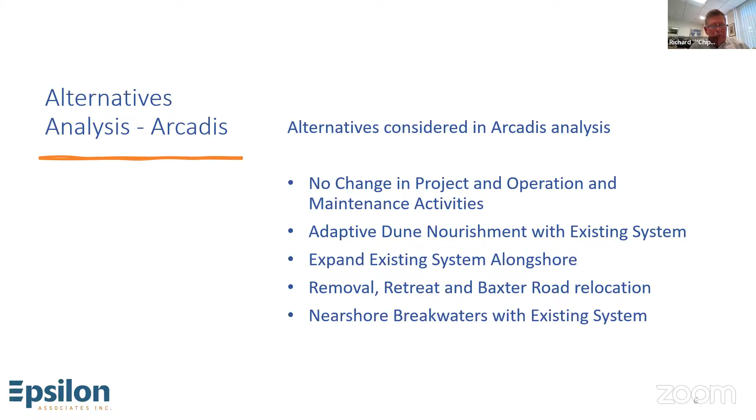Okay, I appreciate that. I think next we're going to go on to the Coir Terrace, which was an alternative that has been used in some portions, but we've considered it to be, I guess, subpar in terms of being able to protect the toe. Dwight, I'm going to turn to you and to Gordon, right? Sure. I could just briefly discuss this and then hand it over to Gordon for a little more detail and context, because I know he's looked at this alternative a little more closely.

As discussed several times tonight and through this process, there has been Coir Terrace along this reach, and actually the initial notices of intent included basically Coir Terraces from 119 all the way down to 59. The subsequent ones reduced those areas just to like 85 to 59, and basically they've been in place from 83 or 81 down to 59. And they've been in place for nearly 20 years.

We see that they provide some level of protection in terms of helping to reduce the rate of erosion, but we still see the block failure, the slope failure, the erosion of the bluff. We still see some retreat of the top of the coastal bank, and in this high intensity environment, those alone, as Chip mentioned, are subpar as compared to a more robust feature such as the geotubes.

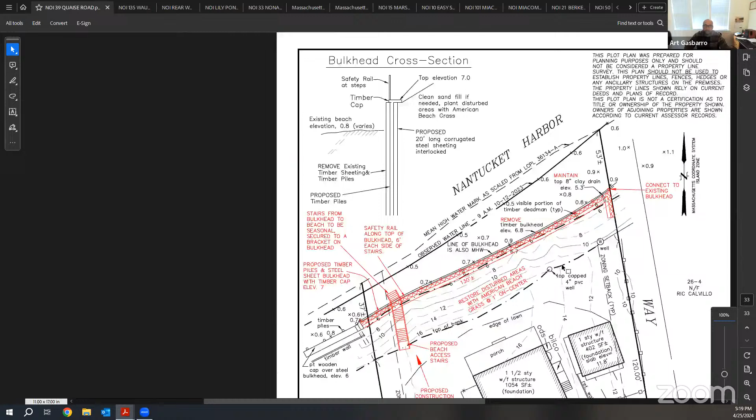Thank you, Mr. Chairman. We're before the commission tonight for the continued public hearing on this application, which involves installing a bulkhead to replace an existing failing timber bulkhead. And based on previous discussion, we had come back to the commission with installing the bulkhead landward of the existing timber bulkhead instead of seaward. And that's what's shown in red on the plan before you with the zigzag type line. And so the last discussion where we left it with the commission, I believe, was there were some questions about the proposed beach stairs. And what we've done is to change the lowest section of the beach stairs, the part that runs from the top of the bulkhead to the beach, to be seasonal.

And that is, we would put a couple of brackets on the bulkhead cap and have a prefabricated set of stairs. It's likely only to be about 4 steps that could slide into that bracket, sort of have a pin or bolt of some sort to secure it through the season. And then at the end of the summer season, those steps could be lifted out of that bracket and carried up and stored in the upland, so that during essentially the winter months, there would be no set of stairs from the top of the bulkhead down to the beach. And then during the season in which the owners are going to want access down to the beach, they'd be able to use a set of stairs to get to the beach on their own property.

I would point out that this set of stairs is nearly identical to the set that is just a couple hundred feet to the west at number 41 Quaise Road, that was approved by the commission and for which a Chapter 91 license was issued. We will be also going to Mass DEP Waterways for a Chapter 91 license for this. Again, we don't believe that the small set of stairs is going to have a detrimental or adverse impact on the interests protected by the commission. Not going to significantly interfere with the rights of passage along that beach for the small bit that it projects. I think that the point of no adverse impact and continued access is clearly demonstrated by the same set of stairs that exists so close nearby on the adjacent property.

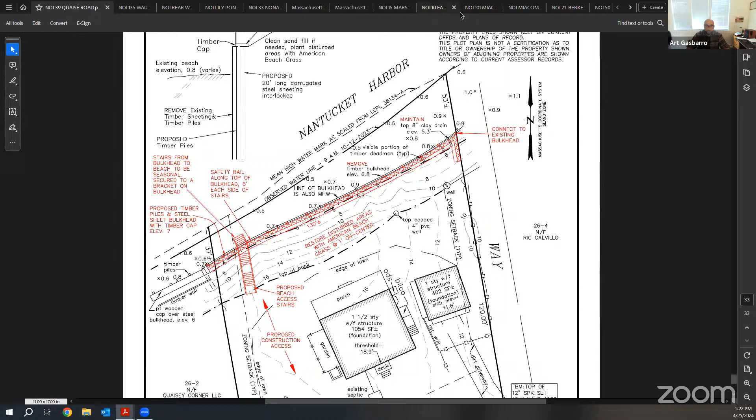And then Attorney Wood is also on with us tonight and has reviewed these materials. We also did a fair amount of research as to other situations very similar where there are a set of stairs on an adjacent way that the commission has permitted an owner to have a set of stairs on their own property. And so we believe that on the basis that this application and this proposal is not going to have an adverse impact on the protected interests and is consistent with other decisions of the commission, that an order of conditions would be issued. And with that, we'd be happy to either Mr. Wood or myself address any additional questions or concerns should the commission have them with the application. Thank you.

Thank you. Commissioners, any questions or concerns? All right, I have one, and it is that generally in permitting these beach stair projects, we receive some type of drawing or cross-section of those stairs. And I don't see that in this packet application, so I'd request that before moving forward.

Mr. Chair, we certainly could provide that. I mean, is that something that we could just have for staff approval? It's going to be a standard section we're going to provide. It's going to be really no different than any of the other stairs, but if you're comfortable with that, we could, it's just the cross section. I don't know.

Yeah, I'm personally comfortable with that. I just think it needs to get into the packet or into the record and into the application so that there's no confusion later on. I'm comfortable with that, Mr. Chairman. Do any members of the public have questions or comments? I see none.

Will, do we have everything we would need to close this application? Yes, we do, pending the cross section, obviously, but we would be closing it with that noted. Yeah, we can add that in the order of conditions. Art, would you like to close the application? Yes, please. Is there a motion to close the application? Mark, thank you. And Mike, I'll give you the second.

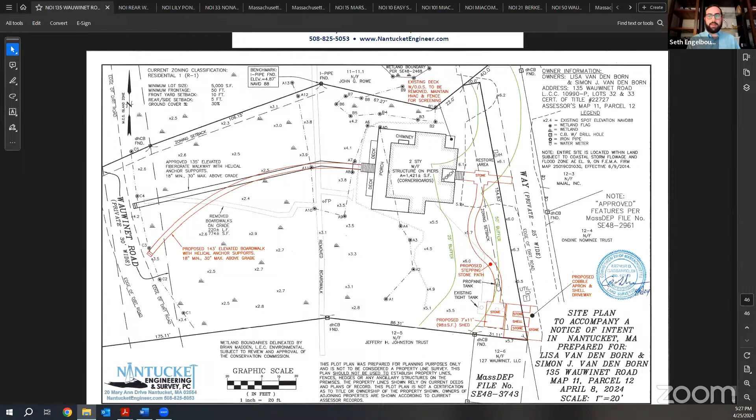Thank you, Art. Will, can you stop the share? Questions, comments from commissioners? Any members of the public would like to chime in on this application? Please raise your hand. Seeing none. Will, do we have everything we need to close? Yes, we do, Seth. Art, would you like to close? Yes, please. Do we have a motion to close? Thank you, Tim, and thank you, Mike, for the second.

By roll call vote, Tim Brain, aye. Mark Beal. Thank you, Art, for making those adjustments. Aye. Mike Mizzarelli, aye. And Linda Williams, it's your turn. Aye. Okay, that closes with unanimous consent. Thank you, Art.

That will bring us into our next agenda item, which is Woodbury Lane Association, rear Woodbury Lane, SE 48 37 49, represented by David Haines. David, good evening. Good evening to you. We continued this a couple of meetings ago because it needed to be posted in the environmental monitor, which it was. And so that was taken care of. Also, we did submit a letter in response to Ms. Fader's letter from last time regarding the drainage.

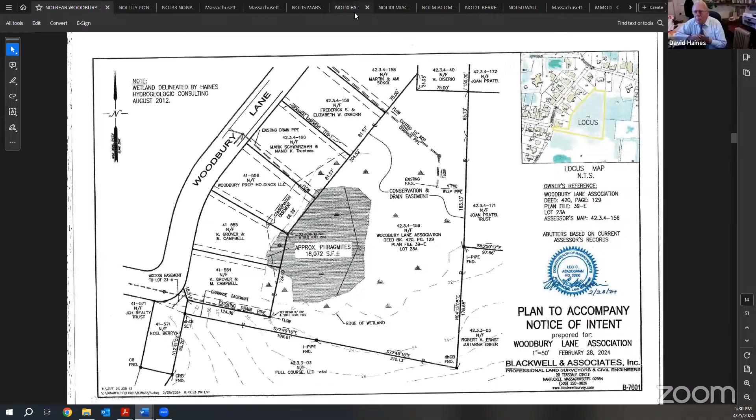Did you want me to go over the procedure that we're proposing to use, or people remember it? If you would like to briefly go ahead. Okay, it's to go in and cut off any seed heads that are there, and dispose of them in the digester, and then to treat the Phragmites either by hand or a weed wand with glyphosate at the recommended application rates, all supervised by a licensed applicator.

And then come in the fall and remove all stalks, take it down to basically bare bones, and repeat the procedure for the following 2 years as necessary. But I think it'll be quite effective for removal this time.

Thank you. Any questions, comments, concerns from commissioners? Okay, any questions, comments, concerns from members of the public? I don't see any. Will, do we have everything we need to close? Indeed, we do. David, would you like to close? Oh, yes, please. Do we have a motion to close? Mark, thank you. And Tim, I'll give you the second.

By roll call vote, Tim Brain. Aye. Mark Beal. You're on mute. Just do a thumbs up, Mark. I'll take that as an aye. Mike Mizzarelli. Aye. Linda Williams. Aye. Great, thank you, and thank you, David. Thank you. Have a good night.

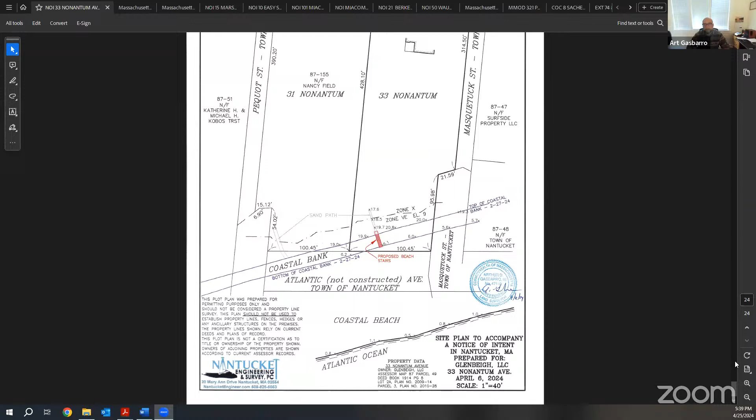That being said, I still would like to continue this application after hearing whether the commission has any other concerns and or questions, and the reason being that we had received a review from Natural Heritage, including the fencing, and I've sent them the same materials and have been following up, but I haven't received back a review based on the revised plans, and I'd like to have that before. I think you probably need that, but either way, I'd like to hear if there are any other concerns, and if not, then we would continue to the 9th, please.

Thank you, Art. And yes, I do think we would need that updated determination. I'll also ask, as I did before, for a cross-section or drawing on the beach stairs. And with that, do commissioners have any other questions or comments? Does not look like it. Members of the public, questions, comments, feedback? Okay, seeing none. All right, you would like to continue until what date? The next meeting, which I believe is the 9th. Yes, May 9th. Okay, that will continue until May 9th.

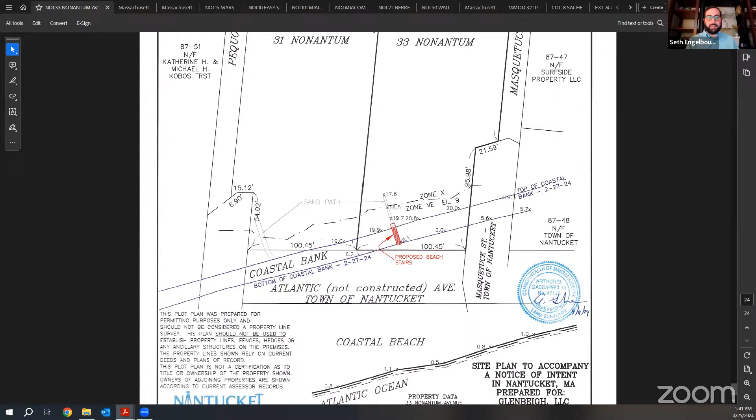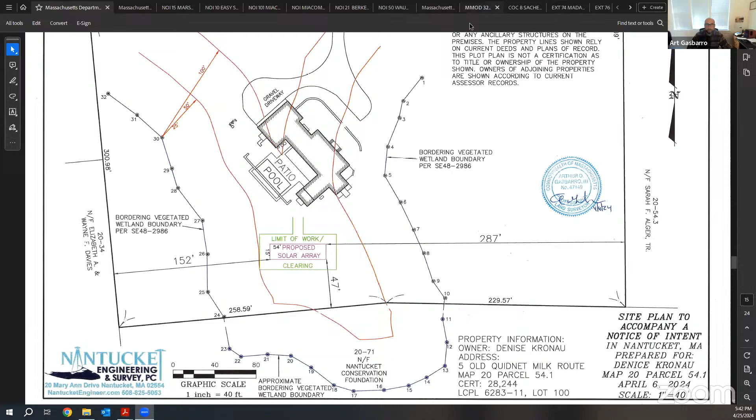There's no waivers required. I believe this project would have been filed as an RDA, except that we are within mapped habitat, so we are waiting for review from Natural Heritage. In terms of the work and the interest protected by the commission, there's no work proposed within 50 feet of the vegetated resource area boundary, and the limit of clearing is fairly limited to install the solar array, shown in green, with the ground mounted solar panels in magenta. Happy to take any questions, and we'd request a continuance to the 9th for Natural Heritage review.

Thank you, Art. Any questions or comments from members of the commission? What about members of the public? Seeing none, we will continue this application until May 9th.

That will take us on to the next agenda item, which is 16 Monomoy Road, Nominee Trust at 16 Monomoy Road, also represented by Art Gasbarro. You're a busy guy tonight, go ahead.

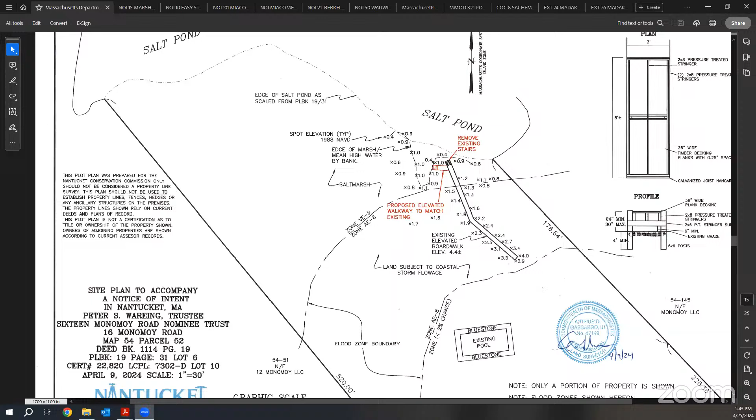I had a little crunch of applications that I managed to get done. We're before you tonight with a fairly small project, which is to make a bit of an alteration and slight extension to an existing elevated walkway that serves the property owner to get down to Salt Pond, which leads out to the creeks. There's a set of stairs at the northerly end of the existing staircase which would be removed, and instead create a slight extension of about 8 feet running westerly to a cove, a natural indent in the topography, and then the salt pond.

And that's where they've typically been using to access the water. It's an easier access for kayaking, primarily. So in order to not walk across the marsh from where the bottom of the stairs are now, I believe they could better protect the marsh and have better access by making this revision.

We would be removing a set of stairs that's essentially equivalent to the size of the stairs that would be added to get down from the elevation of the walkway to the ground. The increase in length of the walkway is about 8 feet. We list it as 11 overall, but that's just to incorporate the set of stairs. When you net that out, it would be prefabricated in the upland and then carried down, with hand dug posts to support it. Overall, I think it'll stop pedestrian activity on the salt marsh grasses and be an improvement there. We'd be happy to take any questions or concerns.

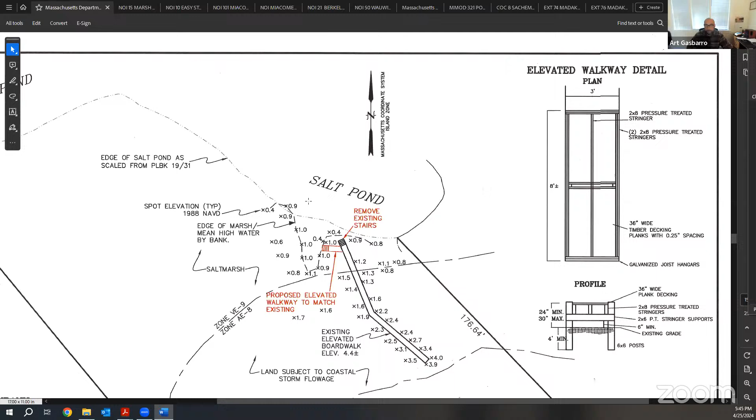Thank you. Any questions, comments, or concerns from members of the commission? Any questions, comments, or concerns from members of the public? I don't see any of that either. Will, do we have everything we need to close?

Are you still waiting for NHESP on this, Art? Or did I have that noted incorrectly? Yes, I believe so, but let me just double check that. I don't think I've seen an email from them yet. Yes, we are, so we would like to continue to the 9th for that, please. Okay, we will continue this application to May 9th then. Thank you. Thank you as well.

That will move us on to our next item, which is Turk Family LLC at 15 Marsh Hawk Lane. Not sure if there's a file number, but it's represented by Paul Santos. Thank you, for the record, Paul Santos with Nantucket Surveyors, and we have received a file number as of today. That number is SE 483766, and staff was copied on that email from DEP to us.

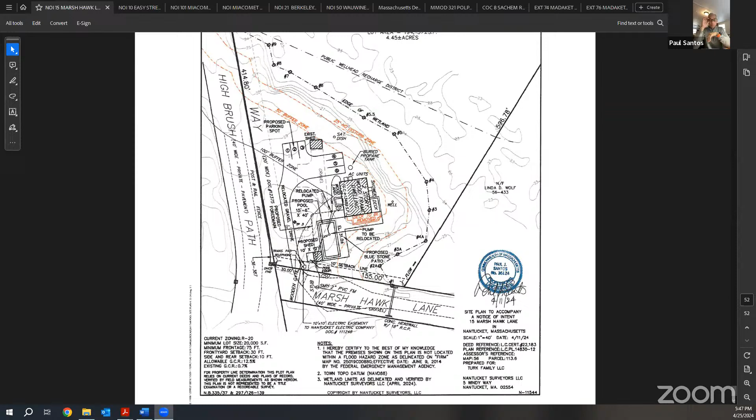On behalf of the property owner and applicant, the Turk Family LLC, this is an application for the proposed construction of an in-ground pool, shed, driveway relocation, landscaping and utilities within the 100-foot buffer zone to a bordering vegetated wetland. The plan depicts the parcel of property, located at a fairly long dead end at the end of Marsh Hawk Lane. The property, while adjacent to the High Brush Path subdivision or Austin Farm subdivision to the left, does not have access to that subdivision, and the parcel is not part of that subdivision.

The subject property itself is located on the north side of the road. It's approximately 194,157 square feet, and includes an existing single-family home on a developed lot in an area where the surrounding land use is residential. The site is serviced by public sewer and a private well.

Up until a few years back, there was an on-site septic system on the property. That system was abandoned when the town provided sewer to the Somerset area, which included Marsh Hawk Lane. So the property is currently tied to public sewer. The site is not located in a flood zone, and it is not mapped under the Mass Natural Heritage Endangered Species Program. The plan before you depicts the existing dwelling.

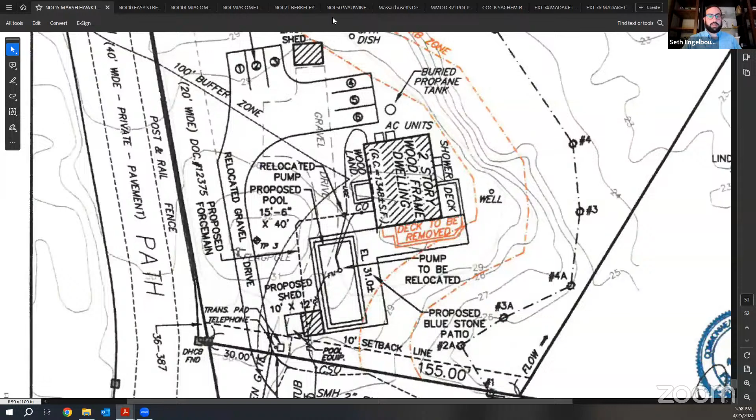I have a concern related to the waiver being applied for, because it requires that applicants prove there is both no adverse impact and no reasonable alternative. And I think in this case a whole suite of reasonable alternatives exist. If you look at the shape of the pool, it could easily be adjusted for that one section to just be shallower. Plenty of people have 4 and 5 foot pools, and the need for a 7-foot pool isn't necessarily being laid out here. Also, as I've mentioned many times before, there are above ground pools, even kind of nifty elevated pools that the project representative before us has proposed in other locations on the island. So I would urge the applicant to look into that and come back with alternatives for meeting that standard without requiring the waiver. Thank you.

That's kind of where I was going, Seth. Thank you. Other commissioners? Okay.

Members of the public, I'll recognize you now. Charlie Gibson, I see you have your hand raised. Will, can we bring him over, please? And I'll remind members of the public to please keep your testimony to issues related to our jurisdiction of the Wetlands Protection Act and the Nantucket bylaw and local regulation. So Charles Gibson, please go ahead.

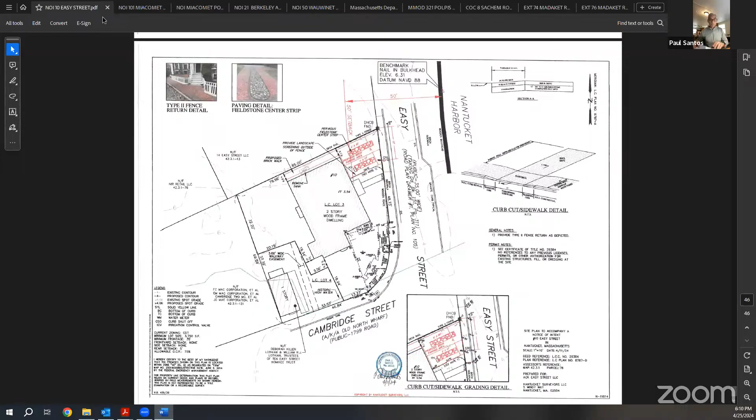And it says portions of the buffer zone between the proposed project and adjacent resource area had been previously altered. It's a vehicular access way, which is kind of the standard waiver you would typically issue in a wetland or resource area located across the street from a particular property. So that's the extent of the application. They have received HDC approval at this point for the driveway configuration. And I'm happy to answer any questions that the commission may have. Commissioners, questions, comments?

So a few things. So it's my understanding that the project actually doesn't need a waiver because it's not considered a structure. It's outside of the 25-foot buffer, right? Oh, that's correct. Yes. So, pervious paving in the current iteration of the regulations is allowed up to the 50-foot line. So I don't think the waiver is needed, but in any case, I appreciate the request. And I did see that the work had started without the benefit of a permit, which is always tough to see, but I appreciate you being proactive about it. Mark, go ahead.

Thank you, Seth. Paul, that was lawn before, if memory serves me. Is that correct? I'm sorry, what was that? Where the parking area is going in, that was lawn, wasn't it? Oh, correct. Yes. So I would be somewhat concerned with the permeability of what's going in there, because that area is underwater on a somewhat irregular basis. I didn't know if that was a concern of yours, the owners. I think it probably should be.

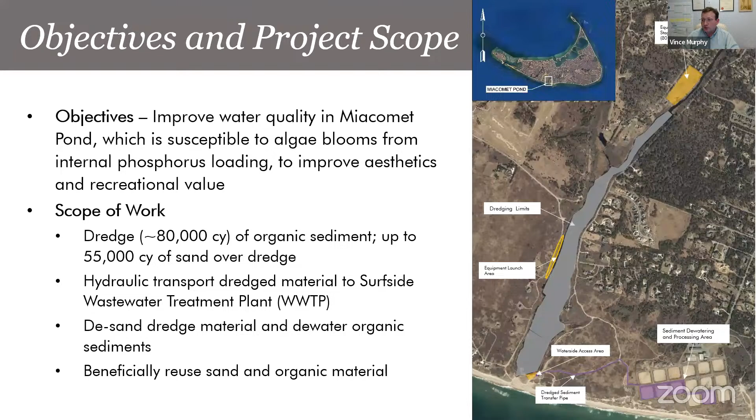Just to give a quick background on how we got to this point, the town has been working on this for quite some time to deal with the buildup of organic sediments and all the nitrogen and phosphorus loading in here. And the town at 2022 town meeting had an article for $300,000 for design for the dredging of Miacomet Pond. This was a tremendous benefit, and then the Land Bank came on board to further support and supplement that. The Land Bank is a partner on this project. In 2023 town meeting, about this time last year, the voters also approved $4 million to undertake dredging works. We're now advancing our design and have funding in place for when we need to move forward with dredging. With that and a little bit of background, we have several more presenters, and for now I'd like to pass it to Emma to talk about water quality issues.

Thank you, Vince. So my name is Emma Morgan. I'm the water quality specialist for the town of Nantucket. And I just wanted to take a few minutes for this slide to briefly summarize the water quality monitoring we do in Miacomet. So Miacomet is one of the 4 great ponds on Nantucket that we monitor in the summer months for general water quality. It's sampled once a month from June to September every year, and it's also monitored on a weekly basis from June to October for harmful algal blooms.

And then we also wanted to summarize the studies that have taken place in the past leading up to this study, focusing on Miacomet Pond and identifying water quality issues in the pond. So in 2010, a summary funded by the Nantucket Land and Water Council and the UMass Field Station on Nantucket summarized Miacomet Pond water quality concerning physical, chemical, and biological monitoring. There's a study done by the town in 2014, studying the watershed of Miacomet Pond.

In 2017, there was the Clean Water Act Section 604B study, which is what identified the phosphorus loading from historically accumulated sediments in the pond, and importantly noted that the dredging of organic sediment within the pond would limit the internal cycling of phosphorus, resulting in these harmful algal blooms that we're seeing.

And in 2022, the MassDEP 303(d) integrated list of waters added Miacomet Pond to the list of impaired waters for harmful algal blooms. And then in 2024, Geosyntec, a consultant on this project, completed a sediment sampling analysis report. And that concludes my summary, and so I will go ahead and pass it off to Rachel Freeman.

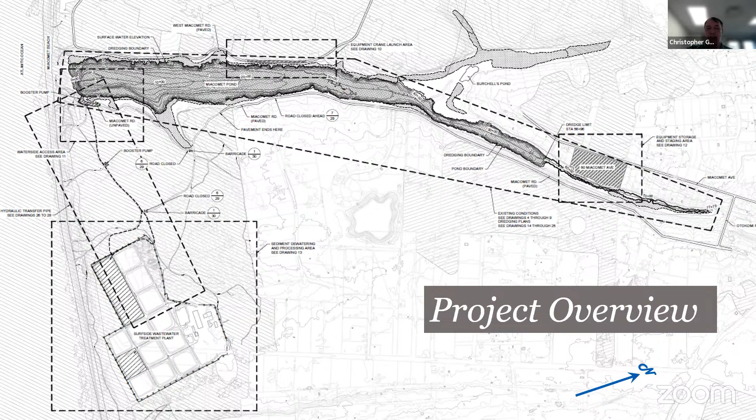Amy, next slide, please. So as I said, there's 3 access points. The first one, which we have some pictures of in a few slides, is the equipment launch area, which is over on West Miacomet Road. It's a dirt road section where we'll set up a crane for when we're mobilizing equipment. We'll set up the crane there for a day or two to lift the equipment onto the pond, the barges and the boats and stuff.

Our primary access point for day-to-day operations is going to be by the existing parking lot where there's a structure which we call the waterside access area. And then we have identified 80 Miacomet Ave, which is a Land Bank property, as a secondary equipment and staging area. No material will be staged there. But if we need to store equipment or vehicles or anything like that, it's a secondary spot to do that.

From a dredging standpoint, we anticipate this project will be done with a hydraulic dredge, and I have a few slides to explain what that is for those that may not be familiar. For the dredging footprint itself, we established some shoreline offsets to really protect the surrounding vegetation. And I have a graphic of that in a minute. The footprint of the dredging is also limited to where we have access from the water from our barge, and we established that we need a minimum of 3 feet of water to be working in from our dredge.

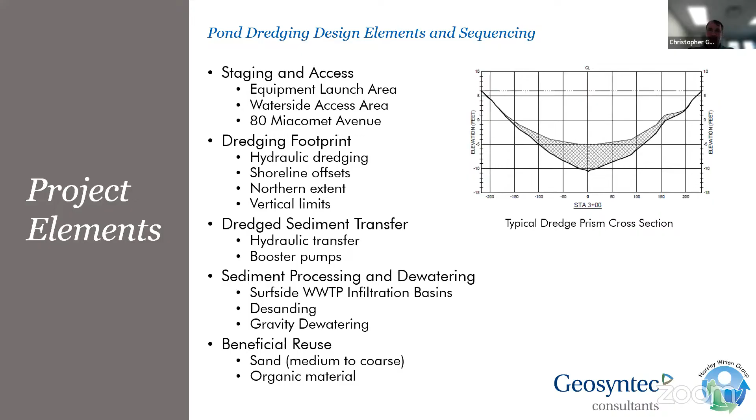And then as we go to the north, the northern extent of this was terminated because there were several resource areas up there, which Amy will talk about in a few minutes, and the water depths did not allow for our equipment to get up in there. But this is the majority of the sediment in the pond, 95% type of thing, that we're targeting as part of this removal.

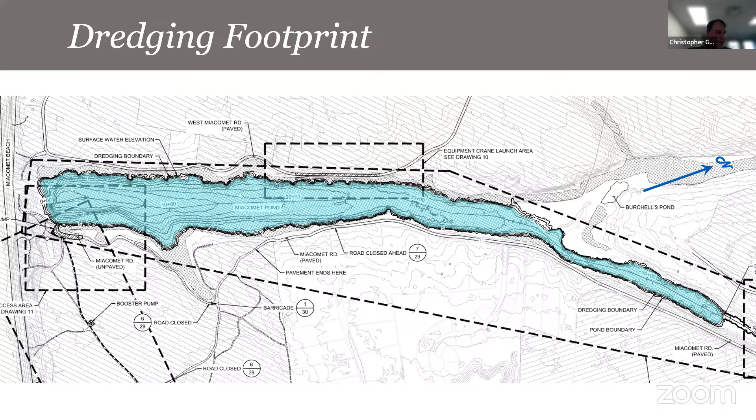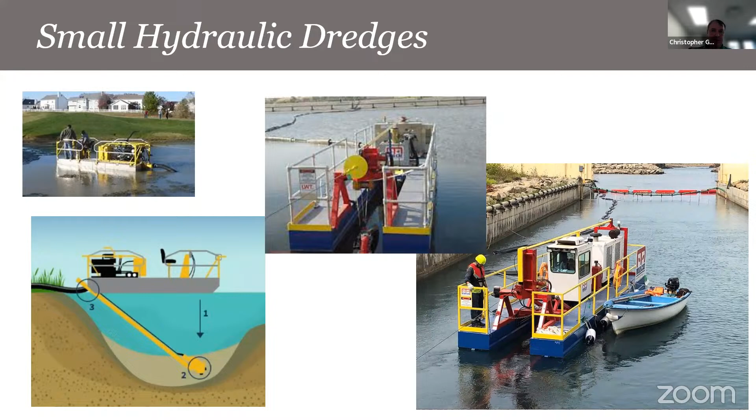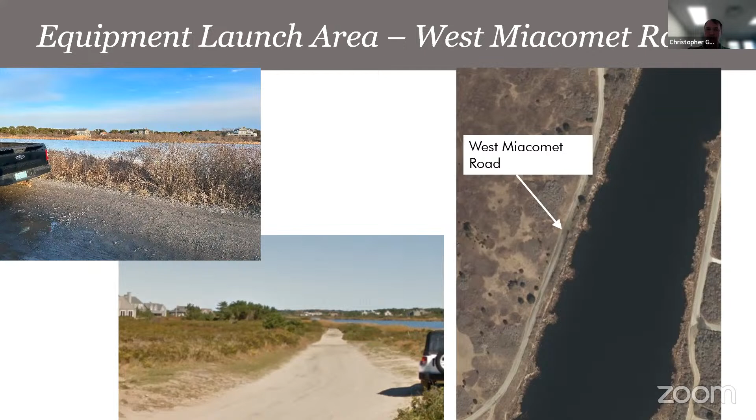This would just be, at the beginning of the project, temporarily closing the road for a day or two during daylight hours to do the launch. And then at the end of the project to pull the vessels and equipment back out for a day or two. Next slide.

This is the water side access. So this is the day-to-day access for equipment and crews out onto the water. This is the existing parking lot, and I think there's that little house there just to the right. And this is used as existing access to the pond. And this is also where the pipe will come in.

We do anticipate, as part of our design, it's quite soft sand, so we anticipate covering this area with temporary HDPE mats to give a stable platform for vehicles and stuff like that, which will then be removed. And we'll be avoiding the vegetation in this area as well.

Next slide. This is just a picture. Amy has some figures later. Horsley Witten, this past, I think it was late fall, early winter, went out and flagged the resource areas around this launch site and water access area. And we have some figures showing those, which she'll walk through in a few minutes.

These are the roadways that the pipe will follow. They are used, as I think most people know that they're out there. Our intent is not to clear any vegetation. The pipe will be on the roadways. They'll be temporarily closed. On the next slide, it does allow for access to the other parking lot near the wastewater treatment plant. So there is still access to the public to the beach during this. And one thing I think I forgot to mention, the work is anticipated to be performed in the off season. So in the fall and winter time, when there is a little less traffic in this area.

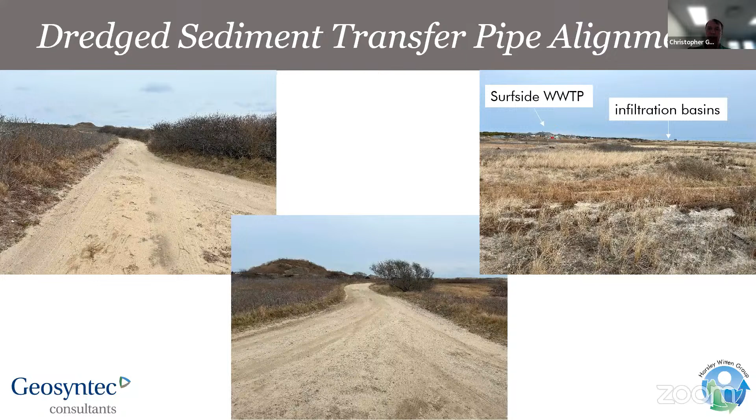Next slide. Okay, I think this is one of my final slides here. The pipeline comes along those roads and then comes into the Surfside wastewater treatment plant. You can see the access road in the existing parking lot. We will put either a ramp over the pipe or bury the pipe so vehicles can still access that parking lot over the pipe. And then once the material comes into it, we have a number of bins or infiltration basins that will be used.

The material will first be desanded, and then we will place it into our dewatering bags in 2 of the basins. And then we've also set aside a 4th basin for just general support. David from the water treatment plant has been collaborating throughout this process with us and has been extraordinarily helpful. And we just wanted to acknowledge and appreciate everything he's done. Again, another benefit of doing this in the off season is he has capacity here to provide us some space to set up within the existing infiltration basins.

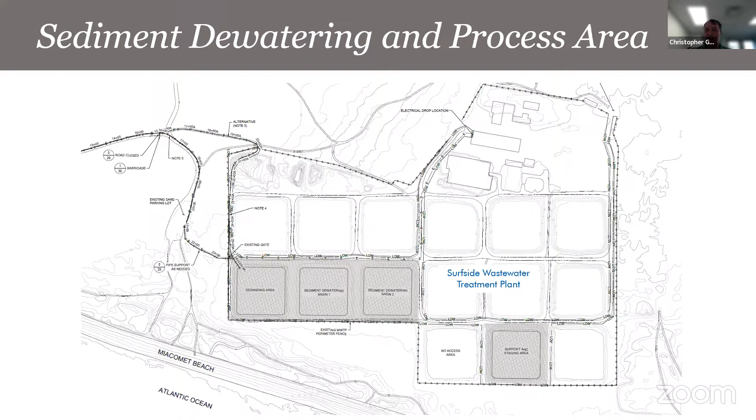The slide here is just a picture of the infiltration basins. For those that aren't familiar with them, they're sand beds, and the water will be allowed to percolate into the sand beds, just like the discharge from the water treatment plant. As part of our sediment investigation that Amy mentioned, we tested the water to make sure that it met the existing permit requirements or exceeded those at the wastewater treatment plant, which it did. And so the water will flow right into those sand beds.

The desanding and dewatering operation. In the top left here is the desanding unit, or an example desanding unit. As the slurry comes into the first step here, any debris or anything really greater than an inch or 2 gets screened off. And then it goes into these desanding units, which use a combination of hydrocyclones or shaker units to get out that medium to coarse sand, which then can be separated out, which is the picture on the right on the top.

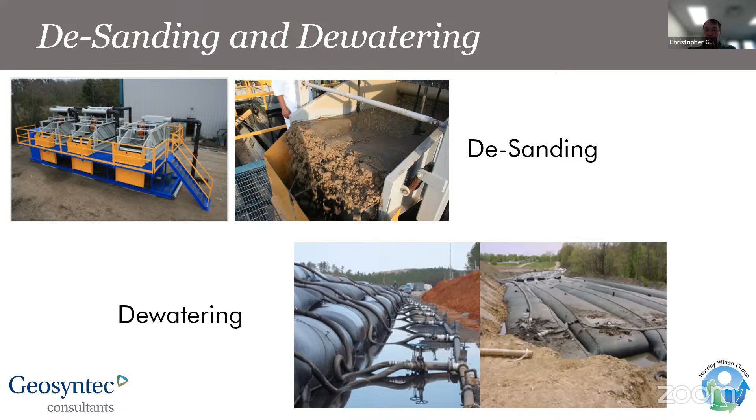And then from the desanding operation, they'll be placed into the gravity dewatering bags on the bottom right here, which I think some folks are familiar with, to allow this sediment, organic material and fine sand to dewater over time. And then once it reaches the desired dewatered state, it can then be transported to a place for beneficial reuse or temporary stockpiling while the town decides where it will be reused. And at this point, I'll turn it over to you, Amy.

Okay, thanks. For the record, Amy Ball, senior ecologist with the Horsley Witten Group. So by virtue of a water-dependent project, a lot of the work will occur within jurisdictional resource areas under the Wetlands Protection Act and the local Nantucket Wetlands Bylaw. Land under water being the largest of the resource areas, followed closely by the land subject to coastal storm flowage, which is the coastal flood zone. As Chris mentioned, about 34 acres of Miacomet Pond will be hydraulically dredged.

And of course, this all occurs within the coastal flood zone, anything below elevation 8 feet at this point in the pond. There's a small amount of inland bank, 68 linear feet, at the crossing where the hydraulic pipe would exit the pond to head toward the wastewater treatment plant. And there's also a narrow band of BVW that you saw in the earlier picture with the pink flagging in that same location. The staging area is technically part of a coastal dune barrier beach system. That's the parking area at that location.

And there's no work within the coastal bank. The western side of Miacomet Pond, based upon its topography and slope, is a coastal bank, but there's no work happening within the coastal bank.

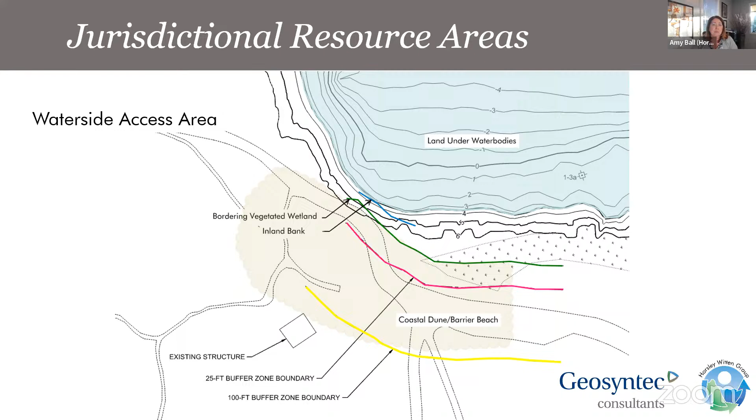As I mentioned, we have rare species habitat. Here's a map from our filing that shows areas to the west, east, and north of the pond, as well as within the pond itself. It's mapped habitat for 14 different species, including 3 birds, 4 plant species, and 7 moth species.

As Rachel and Chris have also mentioned, the area where we'd have to do some additional plant surveys is shaded in this green area between the pipe pathway, the small dirt parking lot at this location, and the infiltration beds at the wastewater treatment plant. This is because there's a prior survey from, I believe, just last fall, and the land bank did not find any of the 4 plant species within this area, but they did not conduct that particular plant survey during the time when one of the species - the fourth species - flowers, which is in the spring.

As I mentioned, we have a request under the local bylaw for work in 2 locations, within the 25-foot buffer zone. This would occur along the access road of West Miacomet Road, as well as the waterside access area, that sort of staging area in the southeast corner of the pond. The second request is for work within 50 feet of rare species habitat, which would occur both at the pond access off West Miacomet Road, at the waterside access area, along the dredge sediment transfer pipe access way, and as well as the in-pond work that is actually within the resource area.

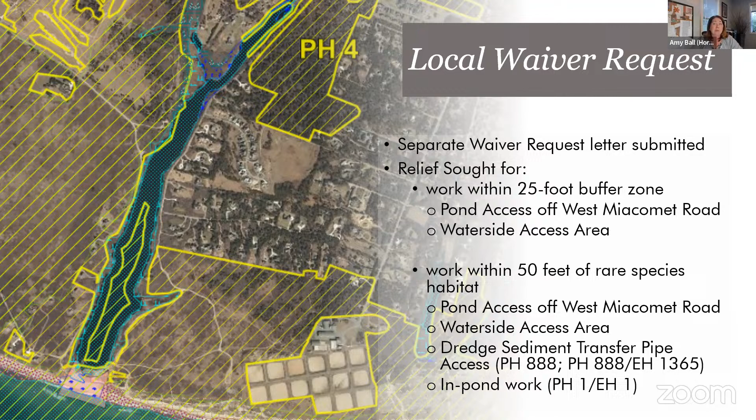And then finally, we have quite a bit of other permitting that we're in the process of working on. We had a MEPA review, an ENF, an expanded ENF, and then a mandatory EIR for both meeting the review thresholds as well as occurring within a local environmental justice community. We had our first MEPA public meeting last evening, and there will be a second meeting in person on May 3rd, next Friday. We're currently in our notice of intent with a simultaneous NHESP project review. We're also filing a 401 water quality certification and a Chapter 91 permit. I believe the Chapter 91 has been submitted, and the water quality certification is about to be submitted. We also require 404 authorization from the U.S. Army Corps of Engineers, and we will require a coastal zone consistency review from CZM. Then just prior to construction, we will also need to file for a NPDES permit.

And with that, I would like to turn it back over to the Commission for questions and discussion. Thank you.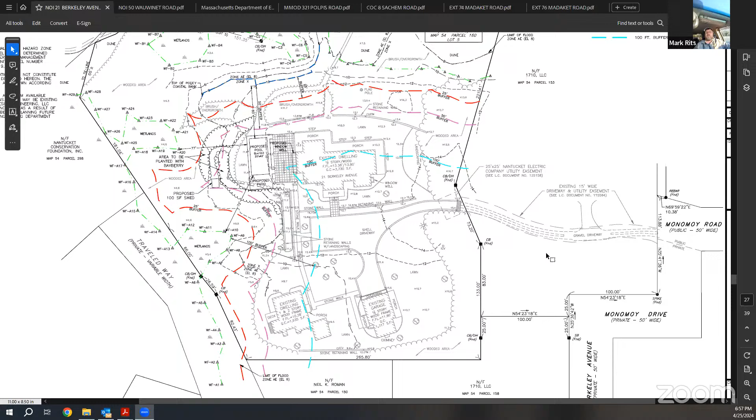What you have before you this evening is an NOI requesting approval to construct a pool on a currently landscaped, altered portion of the property. This property has quite a few wetland resource areas on it. There's a coastal beach, a coastal dune, several BVWs, which were delineated by Brian Madden of LEC, land subject to coastal storm flowage. In addition to all of those, we conducted a very thorough topo survey of the property to determine the extent of DEP policy 92-1 coastal bank. So we have some coastal bank as well on the northern part of the property.

All of the wetland resource areas are shown on the plan. To simplify things, we combined all of the 25, 50, and 100-foot buffers into one, instead of having 75 lines on the plan. After doing that, we chose a pool location which is entirely outside of any 50-foot buffer zone to any of the aforementioned resource areas. We anticipate standard pool conditions for a pool inside the 100 but outside of the 50. We're also proposing some pool mechanicals and the addition of a window well onto the west side of the house, also outside of the 50-foot buffer zone. That's pretty much the extent of the project. I'd be happy to answer any questions.

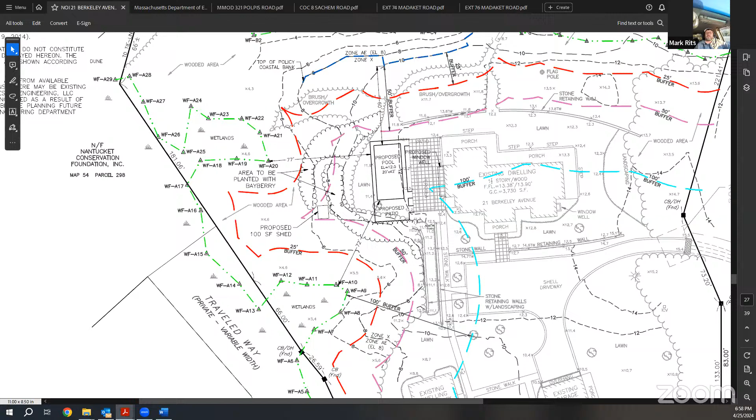Thank you. Commissioners, do you have any questions, comments, or concerns? Seeing none, we'll look towards the public. Any members of the public wishing to weigh in? Seeing none as well. For this one, Will, do we have everything we need to close? Feels like the first time in a few, but yes, we actually do have everything for this one. Mark Rits, would you like to close?

Please. Do we have a motion to close? Thank you, Mark. And seconded by Mike. By roll call vote. Tim Brain, aye. Mark Beal, aye. Mike Misurelli, aye. Linda Williams, aye. And Seth Engelbourt votes aye. Thank you. So that will move us into our next item on the agenda, which is NOI, 50 Wauwinet Road, SE48-3760, also represented by Mark Rits.

Yes, thank you, Chair. Mark Rits from Site Design representing the applicant at 50 Wauwinet. This one, we are waiting for Heritage, so I can either present the project this evening or we can continue it to the next meeting at the commission's pleasure. If you want to hear it and get any questions out there, I can certainly present it now if that would be okay. Mr. Chairman, you can't hear it now. There are two of us that are recused. Myself and Mike both work on this project. You only have three members left.

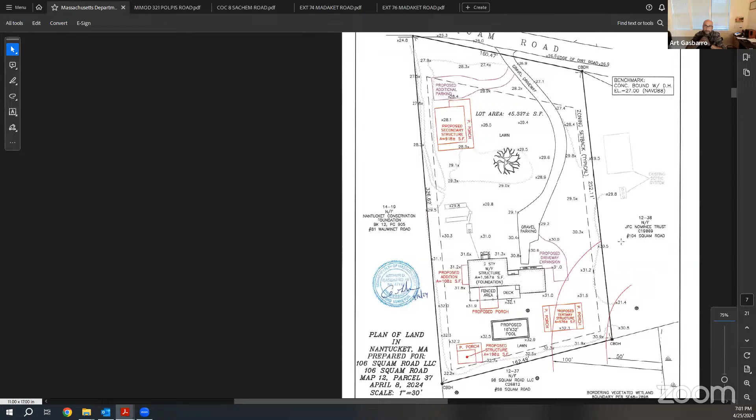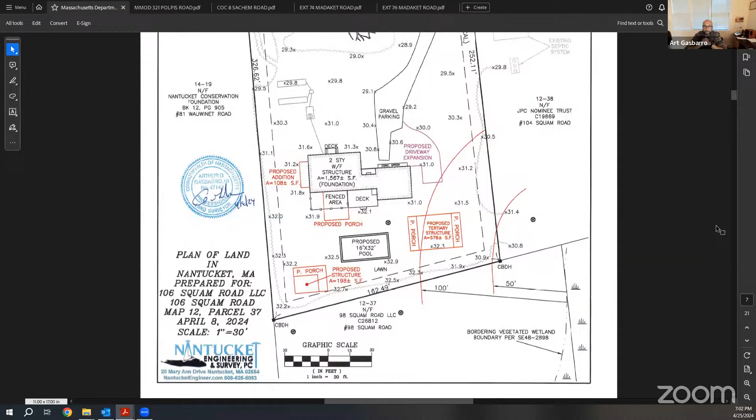Thank you, Mr. Chairman. Before you tonight with an application to construct a tertiary dwelling within the 100-foot buffer zone to an off-site vegetated wetland. The closest portion of the structure is about 65 feet away from the resource area. The structure is proposed within existing lawn area. And we've included foundation details and don't believe that we need a separate waiver for separation to groundwater or any other waivers. So I'd be happy to take any questions that you have with the application. Thank you. Commissioners, questions, comments, concerns? Seeing none, will the staff have a recommendation for us here?

Yep. I visited the site earlier this week. I was recommending a -3, that the buffer zone is present, but the project will not alter. And the box was checked whether additional Conservation Commission review. So there would also be a -6, no additional NCC review needed. And then do we need a positive motion allowing for the work to proceed? Sorry, I thought that was it, but if we do, I can grab that very quickly.

I think if the box is checked that they're looking to... I'm just opening it. I guess they didn't check the box to get a boundary delineation, so I don't think we need it. Yeah, I'm pretty sure it was not. Maybe just -3 and -6. I don't know if Art, if you... Correct. If I may, Mr. Chair, we used the record delineation given that it was on an abutting property and the distance from the structure, which was quite clear that we weren't right up against the 50.

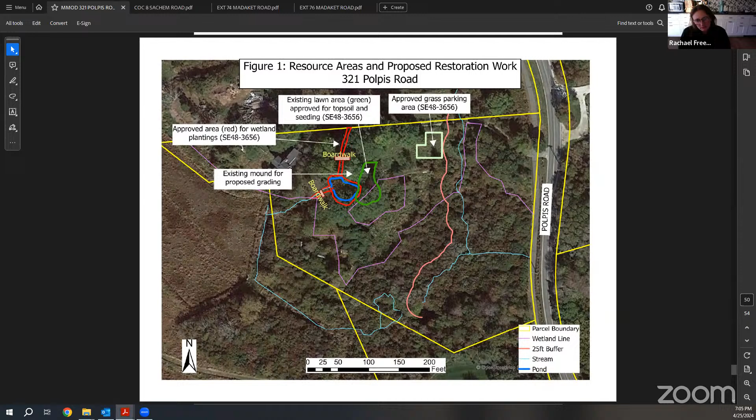And we originally were planning to leave this as a feature, but it looks like it's likely the spoils that were removed originally from the pond when the pond was hand dug or was dug by somebody on the site, and that they put it next to the pond. What we realized after looking at it is that there's potential safety hazard issues with this. We don't feel like we can adequately protect this mound such that children don't have the possibility of sort of climbing up it and tumbling down the backside.

With that in mind, we were requesting permission to remove this and basically level that and, you know, just spread the soil evenly around the site. That is our minor modification request tonight. Thank you. It looks like a great place for King of the Hill, but I understand the safety concerns related to that. So, commissioners, any comments or questions?

All right. Yeah, Mark, go ahead. No, the shades of your youth, Seth. We liked the hill too, but then we looked at the hill with the pond. We didn't like the hill anymore. Yes, I understand. So it was a big hill.

Thank you, Linda. So is there a motion to issue the minor modification? Thank you, Mark. Thank you, Mike, for the second. By roll call vote, Tim Brain. I think we're being too protective of kids, but aye. Mark Beal. I'm pro kid, aye. Mike Miserelli. Aye. Linda Williams. Aye, and I've had 8 of them in my house and 6 grandkids, so I'm pro kid. And Seth Engelbourt, aye. Thank you very much. I could definitely see my toddler tumbling into that pond. Yeah, thank you.

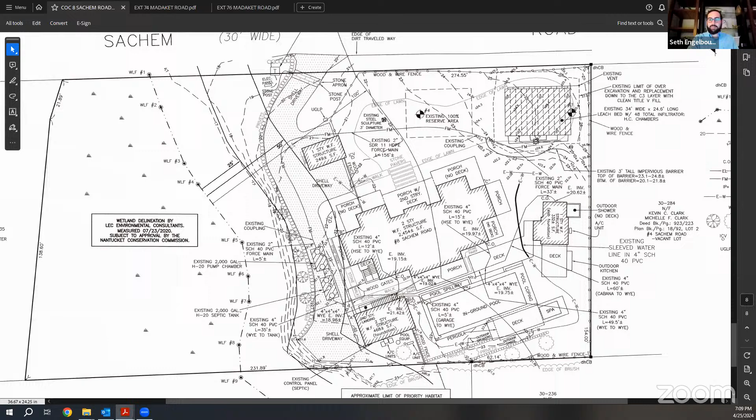So before we get to that, any questions or comments from commissioners? Will, have you had a chance to go out to the site? Yep. Everything is in compliance. The revegetation area looks really good. Was there earlier this week. I do have 9 ongoing conditions, if we're ready for them. Yes, please read the number and what it is.

All right. So we've got condition 19, the pool shall not be drained or discharged into an area within jurisdiction of the commission. Condition 20, the pool shall not be chemically treated between November 1st and May 1st. Condition 21, all chemical treatments shall stop 3 weeks prior to any draining or discharging of the pool. Condition 22, all lighting shall be directed downwards and away from the resource area. Condition 23, the applicant shall provide the contact information for the company maintaining the pool. The pool company shall provide 48-hour notice of any draining to the commission with a plan showing where the pool shall be drained to. Condition 26, no fertilizer or other agricultural chemicals are allowed within the 50-foot buffer zone.

Condition 28, the applicant shall provide photographs of all renaturalized areas on an annual basis. Which was provided. And I incorrectly listed the total number of conditions there. I think it's 7. It's 7. I did fake math. So do we have a motion to issue the certificate of compliance with ongoing conditions 19, 20, 21, 22, 23, 26, and 28? Thank you, Mike, for making the motion, and Tim for the second. By roll call vote, Mark Beal, aye. Tim Brain, aye. Mike Mizzarelli, aye. Linda Williams, aye. And Seth Engelbourt, aye. Thank you so much, Brian.

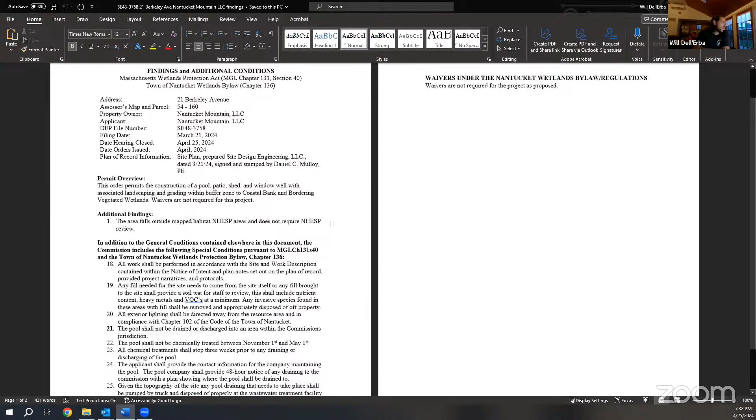Waivers are not required. We had conditions 18 and 19, and then condition 20, that all exterior lighting shall be directed away from the resource area and in compliance with chapter 102 of the code of the town of Nantucket. 21, the pool shall not be drained or discharged into an area within the commission's jurisdiction. 22, the pool shall not be chemically treated between November 1st and May 1st. 23, all chemical treatments shall stop 3 weeks prior to any draining or discharging of the pool. 24, the applicant shall provide contact information for the company maintaining the pool.

The pool company shall provide 48-hour notice of any draining to the commission with a plan showing where the pool shall be drained to. 25, given the topography of the site, any pool draining that needs to take place shall be pumped by truck and disposed of properly at the wastewater treatment facility or be in compliance with chapter 361 of the code of the town of Nantucket. No waiver. Thank you. Commissioners, any comments? Okay, if not, do we have a motion to issue the order of conditions as drafted?

Thank you, Mike. Do we have a second? Thank you, Mark. By roll call vote. Mark Beal. Aye. Tim Brand. Aye. Mike Misurelli. Aye. Linda Williams. Aye. And Seth Engelbourg, aye. And that will actually conclude orders of conditions this time and take us into other business.